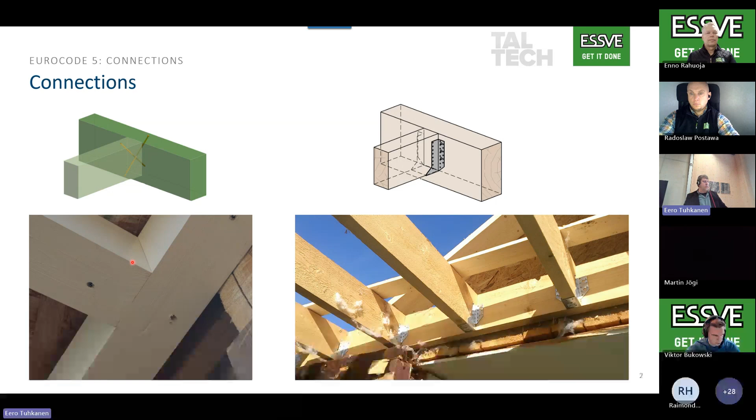The first one is made with crossed screws, and the second one is made with a joist hanger. Both products I cover today are from ESSVE, and I can show you where to find relevant parameters for the design. First, I go to this cross-screw connection. I was taking the geometry of the connection like this. The main beam is glulam 100 times 200 millimeters, and the secondary beam is 90 times 160 millimeters. And I particularly chose glulam because I wanted to show some links to the new Eurocode.

The geometry of the connection looks like this, you see on the picture. The connection I used here was ESSVE ET-T 6.5 times 220 millimeter full threaded screw. And if you see the measurements on the drawings here, if you are a designer and you make the drawing for the carpenter, then you have to, of course, show the points where you have to install the screw, so the carpenter knows how to place the screw into the connection.

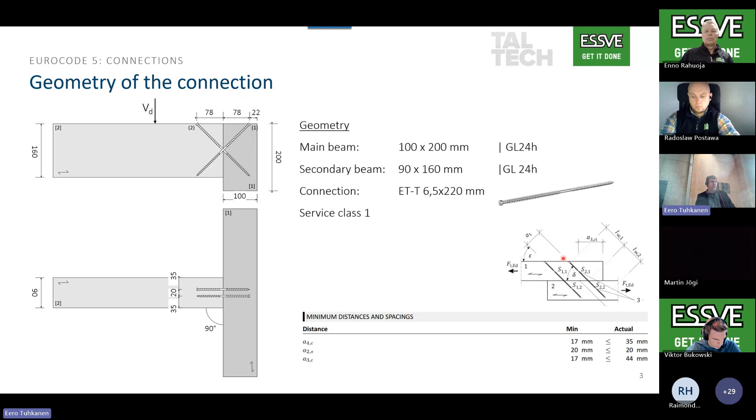But if you calculate these edge distances and distances between the screws, you have to be aware that they are calculated at the threaded part center. It's explained very well in the new Eurocode. It means that this distance to the edge is calculated from the center of the threaded part, but the installation is not at this point, but at this point. So you have to be aware of that. This is the first remark for the designer.

So here are the loads. We are making this presentation for the whole Baltics and Nordics, and here I took the permanent load with the safety factor 1.35. You can, of course, choose the factors available in your country. For example, in Estonia, we have 1.2, but this example is made with common Eurocode factors. And here you can see the permanent load is 1.2, variable load is 3.6. And the load combinations you have to calculate through are first load combination 1, which includes only the self-weight or permanent loads, because the k-mod value is lower in that case.

And the mostly decisive load case is where we also have variable load included, and here we have to calculate with k_mod 0.8. That's commonly the decisive load case, but again, you have to be aware if you have very high concentration of permanent load, then it may be that the first load case is decisive. For example, if you use on the floor a timber concrete composite, then the concrete will give quite high permanent load, and then it's necessary to check this load case as well.

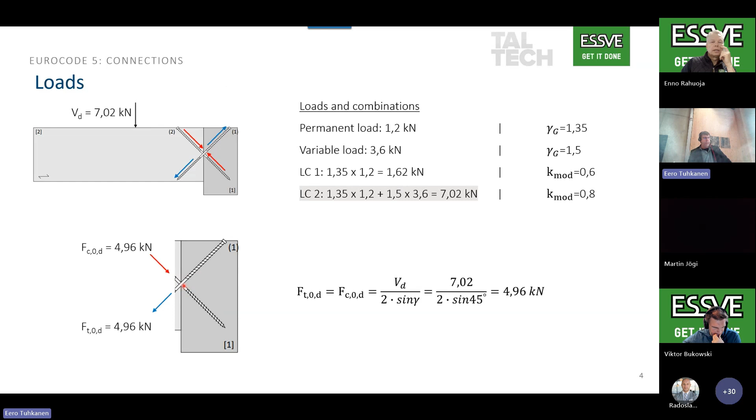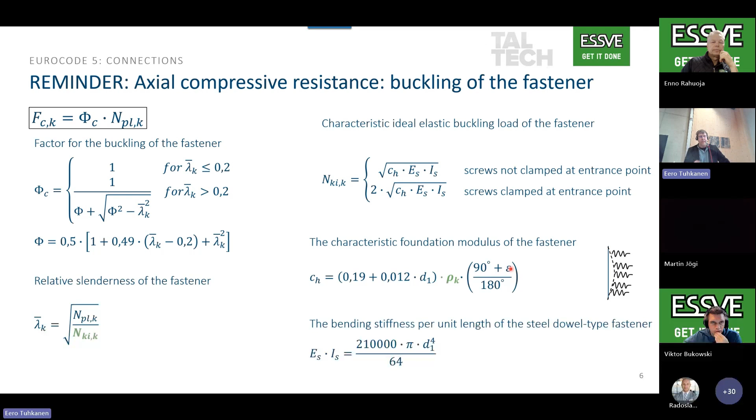And the third thing here is compressive resistance. This screw in compression can buckle in the timber, and we can calculate this buckling factor for the screw. I made here in the slides a slight reminder. This is from the spring academy, where this calculation is presented, how to calculate this buckling resistance. And the buckling resistance depends also on the angle between the screw and the wood fiber, and that's why buckling is decisive in the joist part, because here the angle is smaller.

So based on these three numbers, I can say that compressive resistance is decisive, and I can calculate the compressive resistance design value, which is the characteristic value divided by the safety factor, and I can say that the load carrying capacity of one screw is 5.33 kilonewtons, which is higher than the load in the screw itself. So we can say that this connection meets the requirements and has 93% utilization rate.

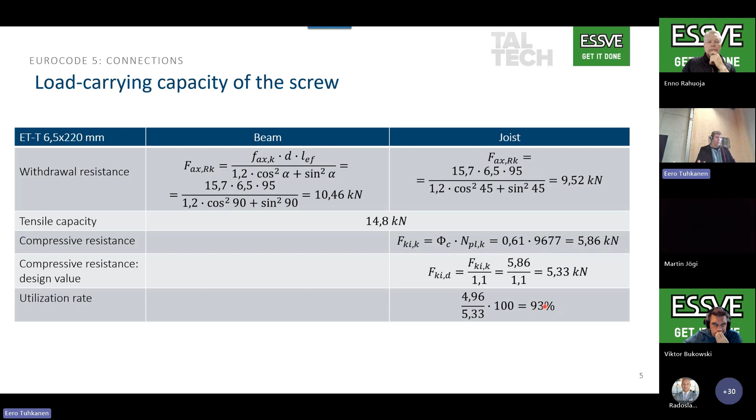The other reminder, which is new in the second generation of Eurocode, is that characteristic withdrawal strength can be higher if the screw goes through at least 4 lamellas. And you can increase the load carrying capacity or the withdrawal strength up to 15%. But in our case, it's not applicable because this screw goes through 2 lamellas only, and here we cannot increase the load carrying capacity of that.

But in next academic sessions, I have some examples where we can use this new k_mat parameter to consider the strength increase due to the number of lamellas.

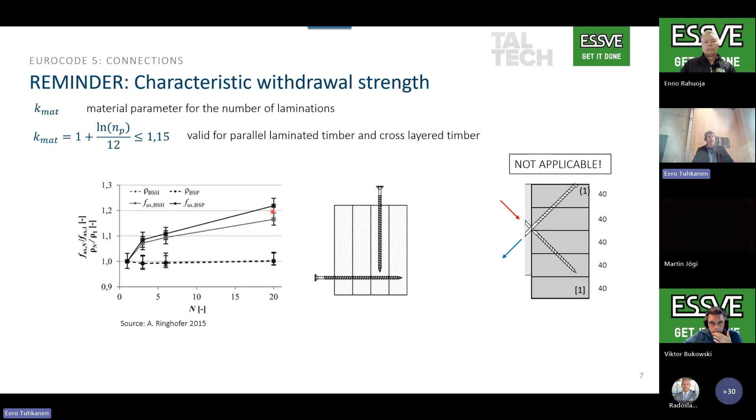And the second way to solve this connection is to use a joist hanger. It's the so-called three-dimensional metal plate, which is also introduced in new Eurocode. And I use the same timber cross sections, and the joist hanger is 90 by 145, which means that the width of the joist hanger is 90 and the height is 145. And I used ring shank nails 4x40, which is a common product in ESSVE catalog.

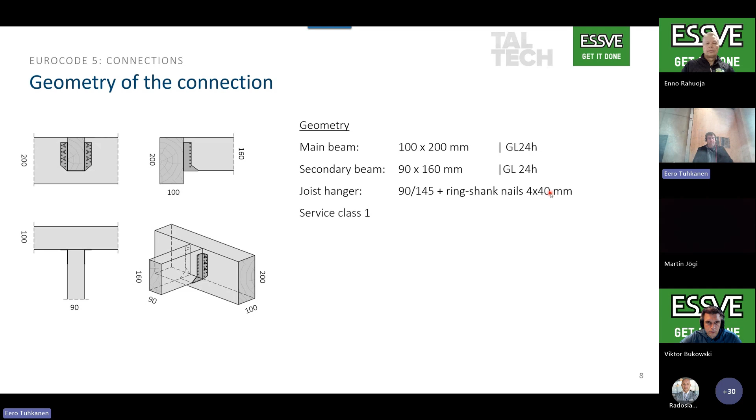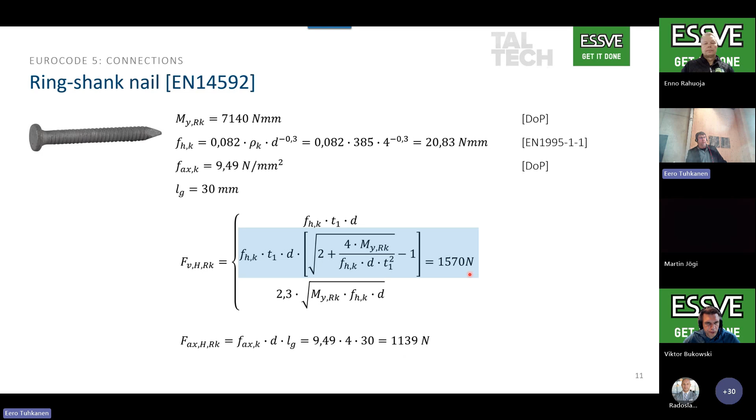Also, I need the information for the nail itself, and I calculated this ring shank nail from ESSVE catalog. I calculated the load carrying capacity in shear and also withdrawal capacity for this formula. These two values are now used in this formula I just showed. And according to that, you can find out the load carrying capacity of the connection, which is the minimum of the two values.

I forgot to mention that this formula includes two parts. The first formula here is calculating these connections here, which take the joist to the hanger, and the second formula considers how this joist hanger connects to the main beam. So the minimum value of these two is considered. And according to my calculations, I found out that the design value for this connection with partial nailing is not fulfilled. It has 6.1 kilonewton, but we had a little bit over 7.02.

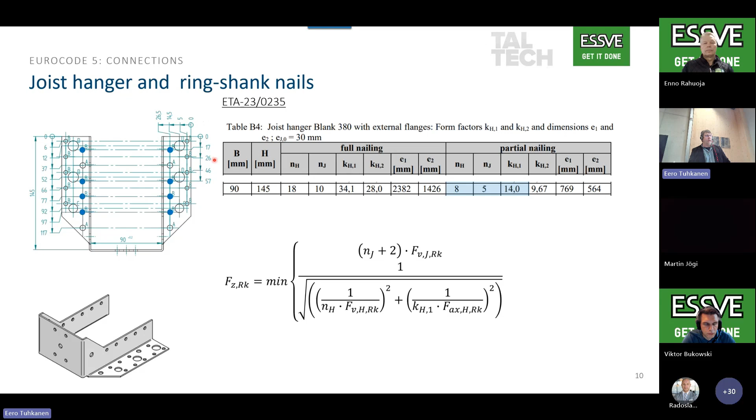It means that we can use full nailing, and we can use these parameters to fulfill the requirements. Or if you know how the holes are placed, you can also calculate yourself according to this Eurocode formula. Let's say not full or partial nailing, but you can add some nails to find out the increase of the load carrying capacity of the connection.

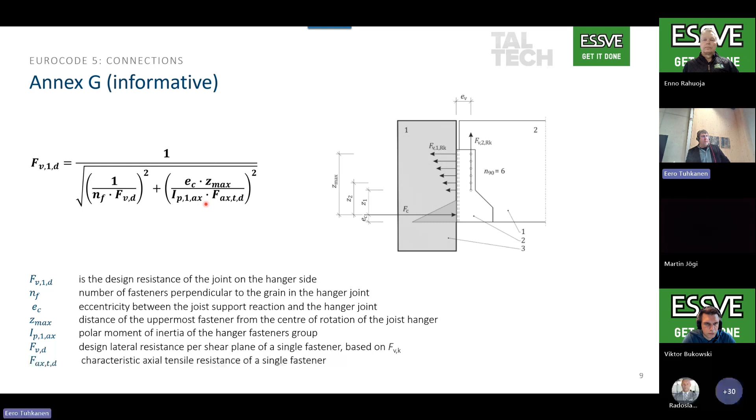But for the carpenter or builder, it's very hard to say that yeah, you have to fill these holes with the nails and some of the nails outside. It's easier to say partial or full. Otherwise it's going to complicate it.

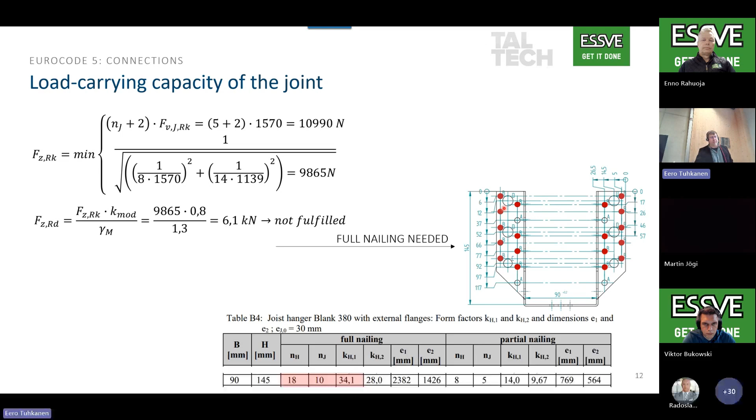Sometimes the builders say that it's easier to install the joist hangers and then put the secondary beam into it, but you can also do that in this case. So you can screw or nail here downstairs, let's say, one small timber lattice to hold all the secondary beams in place, and then you can easily install the screws. So it's up to you.

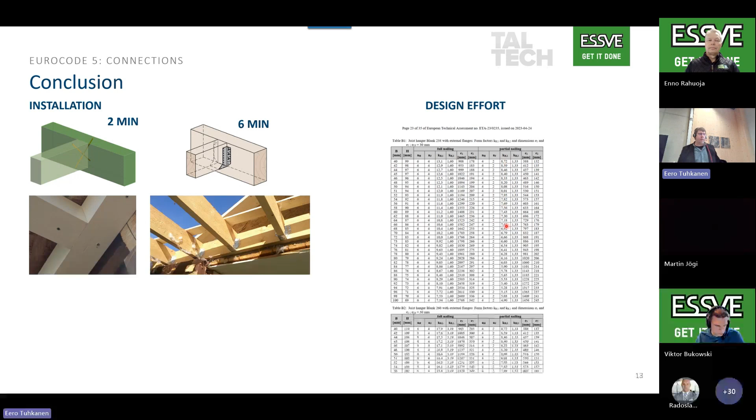So that's all from my side. Next time, I think we have the topic how to strengthen the beam if you have a renovated building and you need to add load, how to make the beam stronger, and I show some options for that. So thank you.